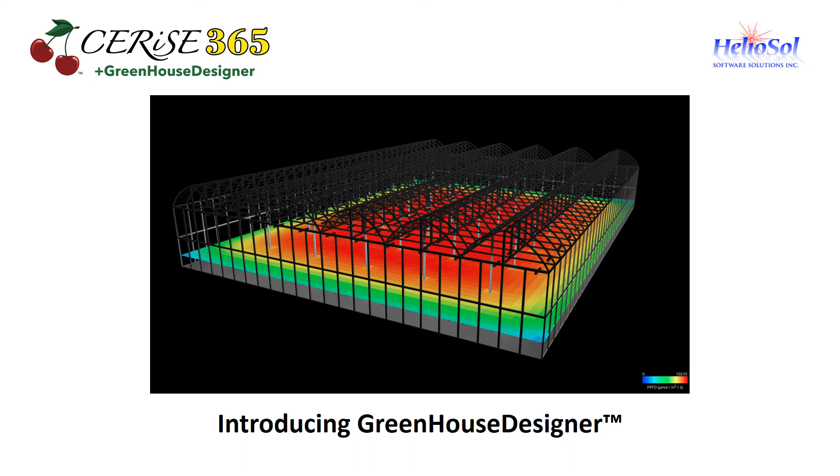Greenhouse Designer is a software as a service, or SaaS, application, where all the lighting calculations are performed in the cloud. All that the user needs is an everyday web browser running on a personal computer, tablet, or even a smartphone. Unlike architectural lighting design programs, no software installation is required.

The best way to introduce Greenhouse Designer and its features is to simply walk through the steps of designing lighting layouts for both a greenhouse and a vertical farm. So, having created an account, we can sign in with our username and password. Greenhouse Designer allows us to have multiple clients, and so we begin by selecting the New Client button.

Each client can be assigned a name and address, and optionally their geographic location. So we create a client called Aardvark Farms and select the Save Client button to add the client to our account. Now, each client can have multiple projects, so we select the New Project button to create one.

While there are many different greenhouse designs, most of them can be categorized according to the roof design style. The most popular ones are Arch, Gothic, Sawtooth, and Venlo. For vertical farms, we have a choice between tables and stacked trays in an enclosed room.

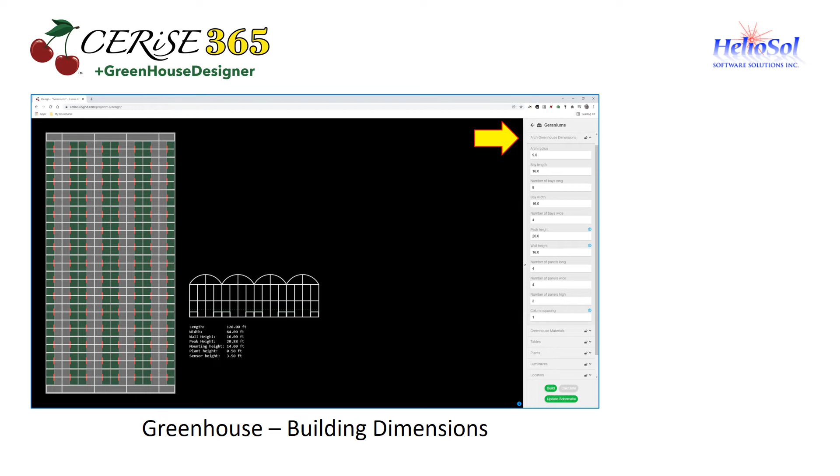We now open the Greenhouse Dimensions tab, which presents us with a variety of dimension parameters. The explanation of these parameters is provided in the Cerise 365 plus Greenhouse Designer User Manual, but the design process for each of them is straightforward. We can, for example, change the number of bays wide from 4 to 6, and select the Update Schematic button to redraw the layout. The Build button will change the color from green to red when the schematic needs to be updated.

Behind the scenes, Greenhouse Designer redesigns the building geometry without communicating with the cloud server. If we enter an invalid parameter, such as a wall height that is greater than the roof peak height, Greenhouse Designer will explain the error when we attempt to redraw the schematic layout.

Once we are satisfied with the building geometry, we can select the Greenhouse Materials menu tab to specify the greenhouse glazing properties. Greenhouse Designer models the optical properties of greenhouse glazing, including transmittance, reflectance, and light distribution. These properties can be independently specified for each wall and the roof. In addition, the floor reflectance can be specified.

Glazing can be specified as clear, diffuse, or opaque. An advantage of this is that the reflectance of energy curtains and light pollution abatement screens can be modeled. Highly reflective curtains and screens can recycle the light in a greenhouse, significantly increasing the photosynthetic photon flux density, or PPFD, incident on the plant canopy, and in doing so save energy.

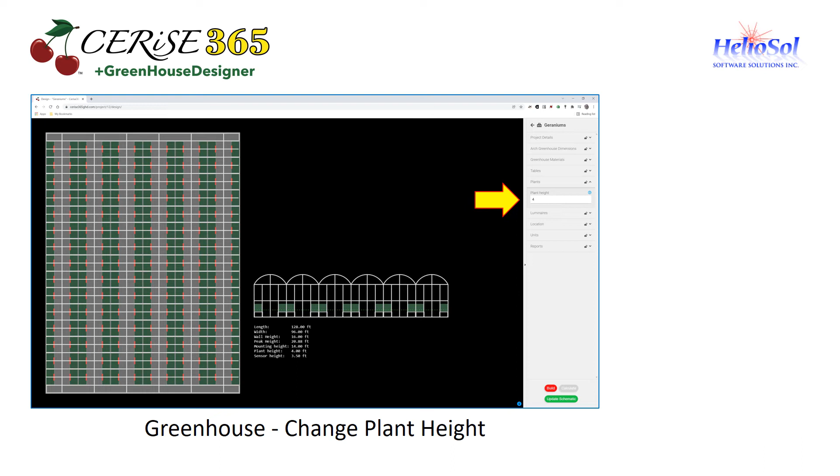Choosing the appropriate plant height is important, as the canopy of tall plants, for example trellis tomatoes, will be closer to the luminaires. This will affect both the PPFD values and their spatial uniformity within the greenhouse.

Luminaires are, of course, at the heart of horticultural lighting design for both greenhouses and vertical farms. Greenhouse Designer includes a database of horticultural luminaires from many different manufacturers, each with its own photosynthetic photon intensity and spectral quantum distributions. Greenhouse Designer relies on the ANSI/IES TM-33-18 standard for electronic transfer of luminaire optical data to represent the optical properties of these products. In fact, TM-33 was originally developed by SunTracker Technologies specifically for Greenhouse Designer before becoming an international standard.

To choose a specific luminaire or browse for an appropriate product, we select the Choose button, which opens the luminaire database page. We can select the manufacturer's product by its catalog number, and we can open SunTracker Technologies CeriseDocs to view its luminaire optical properties. CeriseDocs displays all of the luminaire optical data present in the TM-33 document in both tabular and graphical form. Here, the product spectral power distribution is displayed.

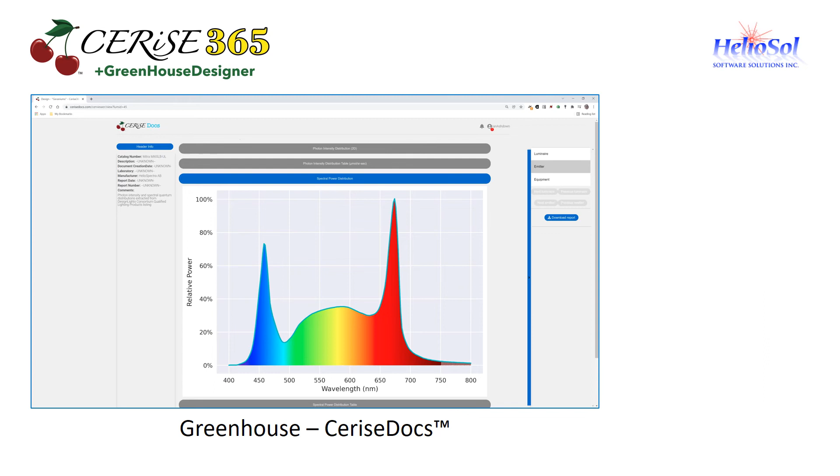Having chosen our luminaire, we can now specify the row and column spacing, the mounting height, and whether the luminaires are to be oriented parallel or perpendicular to the building length. Greenhouse Designer positions a rectangular array of PAR or quantum sensors with 2-foot spacing at a user-specified distance above the floor to measure the PPFD distribution. In general, we want to position the sensors to be at the height of the plant canopy.

We can further specify the greenhouse's geographic location. With this information, Greenhouse Designer can calculate the monthly daily light integral, or DLI, values for its project report.

Finally, we can specify whether the measurement units are to be imperial or metric. We would probably want to do this at the beginning of the project, though the default choice can be specified in the user account. Having specified the project parameters, we select the Build button.

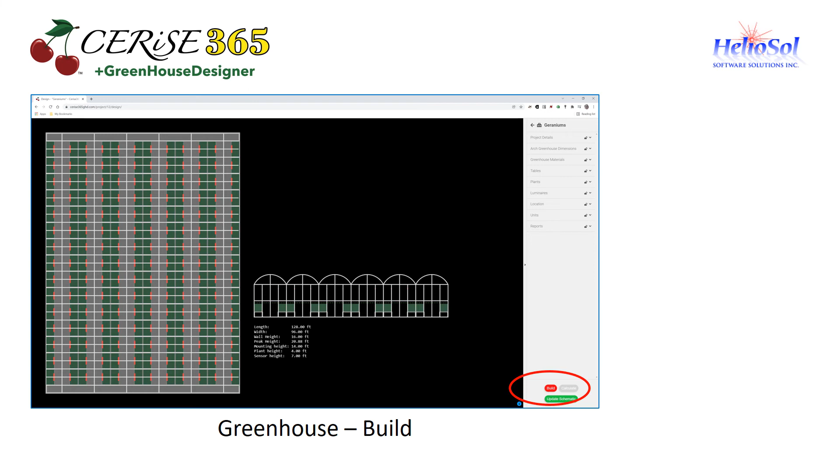The Greenhouse parameters are sent to the cloud server, which takes less than a minute to prepare a computer-aided drafting, or CAD, model for the lighting calculations. This is where Greenhouse Designer differs from architectural lighting design programs. Without the unlimited complexity of architectural designs, Greenhouse Designer can use a parametric model to represent the greenhouse or vertical farm geometry. The model is basically stretched and extended according to the user-specified dimensions.

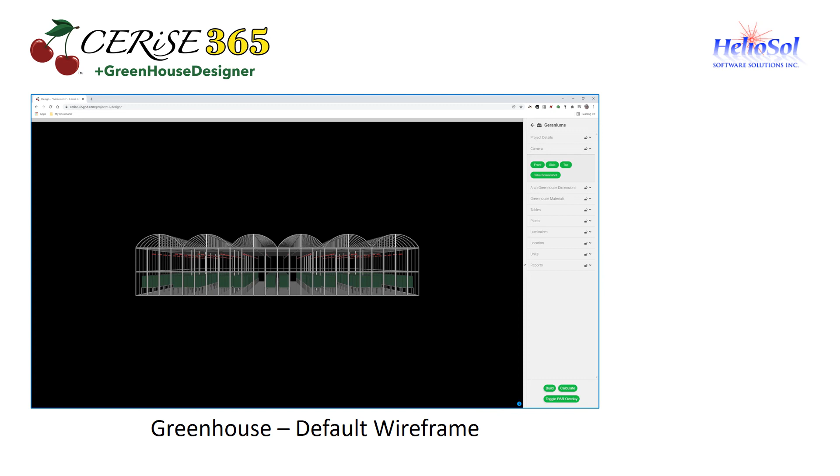The advantage, of course, is that the user does not need any CAD design experience or skills to generate horticultural lighting design plans. The resultant CAD design is presented as a so-called wireframe model that allows us to confirm that the design meets our requirements. It is a three-dimensional model, and so we can interactively view the design using the mouse controls.

We can also select the Toggle PAR Overlay button to view the PAR sensor grid overlay. In doing so, we can confirm that the PAR sensor height is where we expect it to be. If anything needs to be changed, we can do so and rebuild the greenhouse. Otherwise, we can select the Calculate button to perform the lighting calculations.

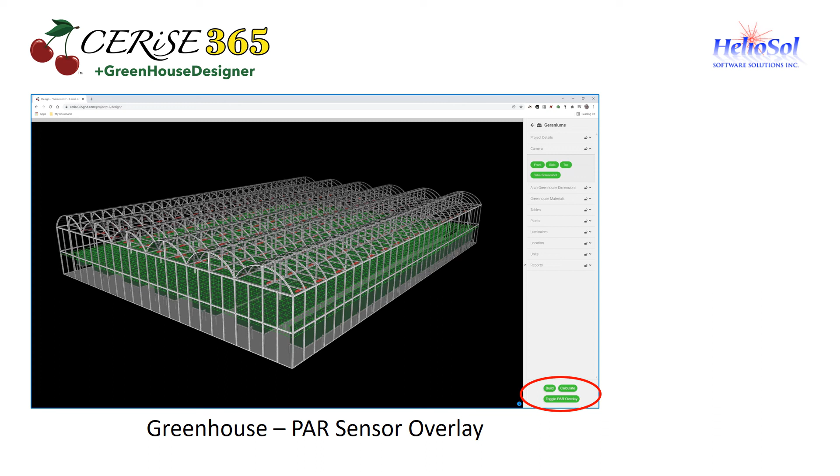Greenhouse Designer uses the same calculation engine that has powered architectural lighting design software for nearly a quarter century. It models both the light directly emitted by the luminaires and light reflected from illuminated surfaces. The calculation time depends on the number of luminaires and the size of the greenhouse, but in general, it will take only a few minutes to complete the calculations.

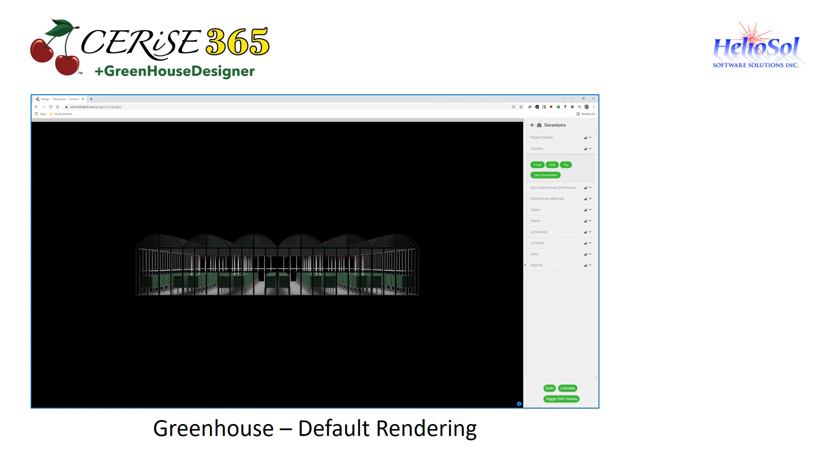The resultant photorealistic rendering shows the distribution of light in the greenhouse using white light. If the spectral quantum distribution of the luminaire is known, it would be possible to render the greenhouse using the light source colors, such as yellow for high pressure sodium or blurple, or blue and red LEDs. However, it is more informative to use white light. The rendering is also a three-dimensional model, and so we can interactively view the design using the mouse controls.

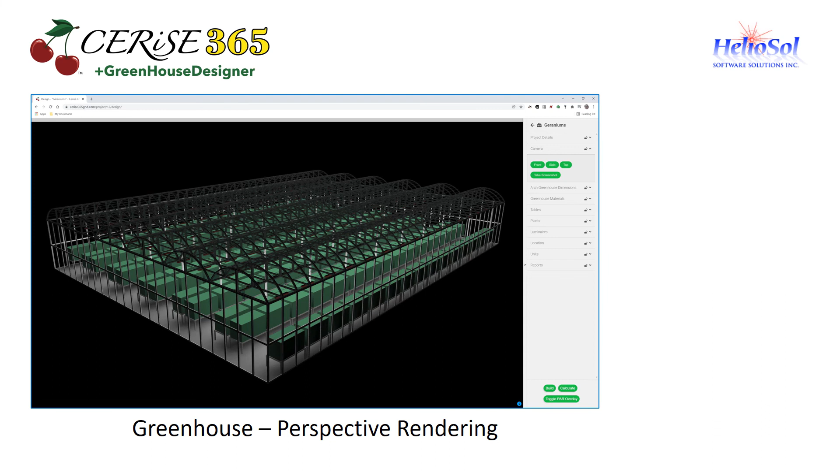We can also use the camera controls to select predefined camera positions, such as this top view. By selecting the Toggle PAR Overlay button, we can display the spatial distribution of the PPFD at the height of the plant canopy. We can also choose an arbitrary camera position and orientation, and again view the PPFD distribution. We can further select the Take Screenshot button to capture an image of the rendering for inclusion in the custom report for a client.

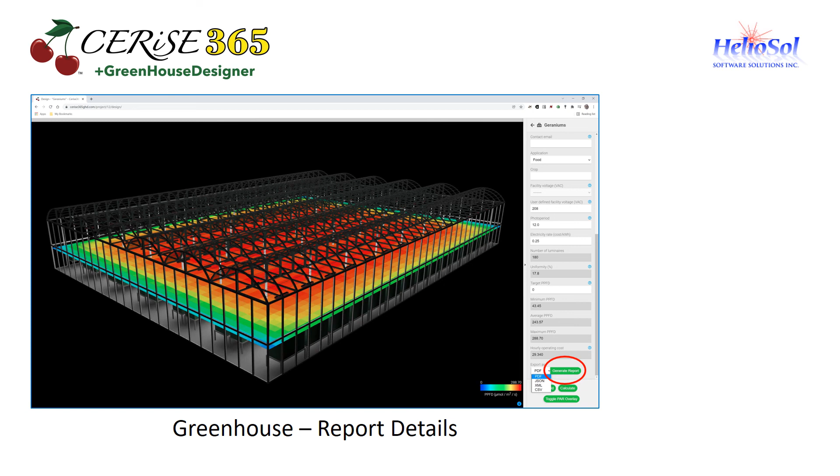Greenhouse Designer can generate a comprehensive project report for the client with user-specified parameters such as target PPFD, photo period, facility voltage, electricity rate, and more. The report can be generated in various formats such as PDF, JSON, XML, and comma-separated value spreadsheets by selecting the Generate Report button. It will take a minute or so to generate the report, after which the file will be automatically downloaded to the user's web browser.

The default PDF report includes textual information regarding the client, project, building and table dimensions, luminaire, and report summary, as well as graphical displays of the PPFD distribution, the luminaire photon intensity distribution, and the monthly daily light integral report for the building's geographic location.

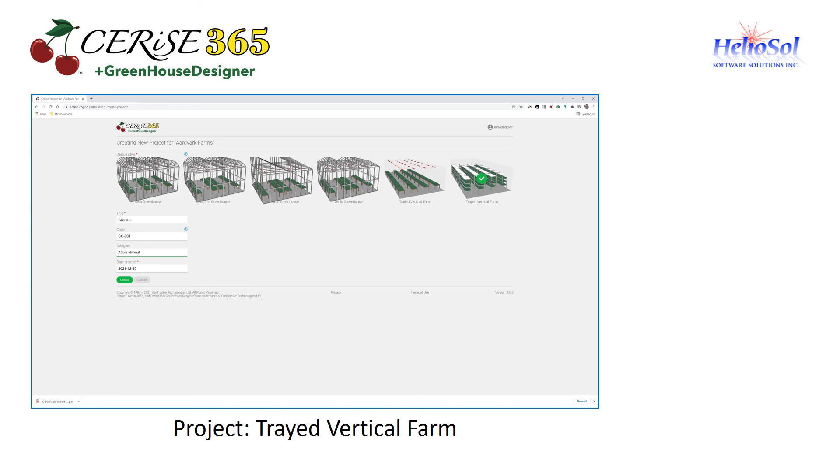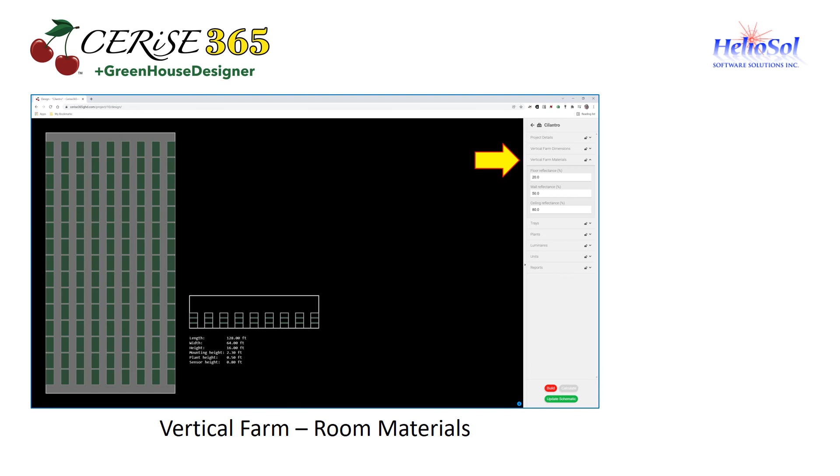Our next project is a trayed vertical farm. The alternative is an enclosed room with plants such as cannabis placed on tables or on the floor. Greenhouse Designer again creates a default vertical farm for us with the design shown in the plan and elevation views. We can modify the room dimensions as needed, and also the room surface reflectances. The default model assumes 3 stacked trays, 2 of which are equipped with luminaires, but we can change this according to our needs.

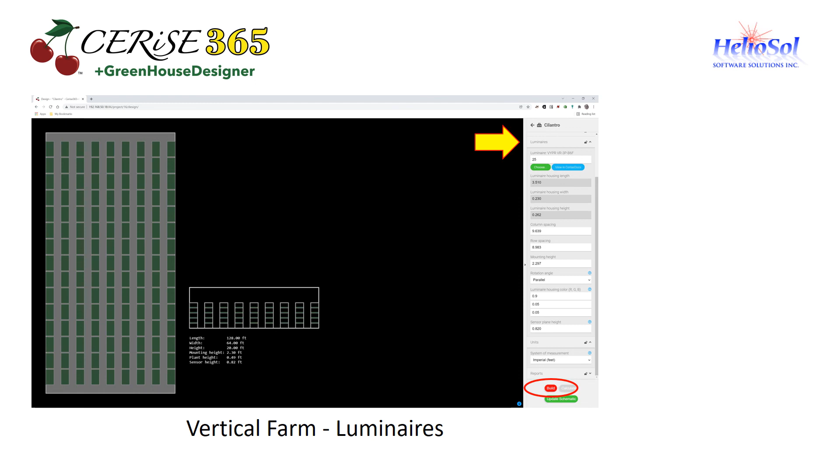As with greenhouses, we can choose luminaires from the luminaire database and specify the row and column spacing on a per tray basis. We can then select the Build button to view a wireframe model of the stacked trays. Each tray, however, is individually illuminated, and so it does not make sense to render the entire room. However, we can select the Only Build Tray Model checkbox before selecting the Update Schematic button. This gives us the tray schematic layout showing the luminaire spacing, plant height, and PAR sensor height.

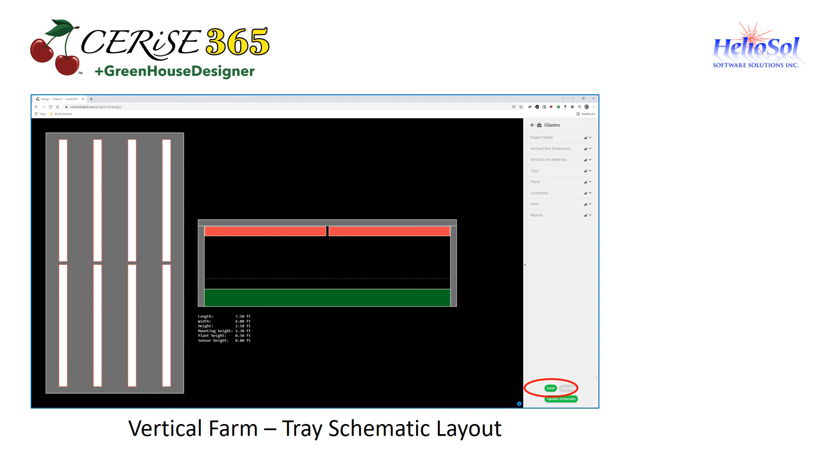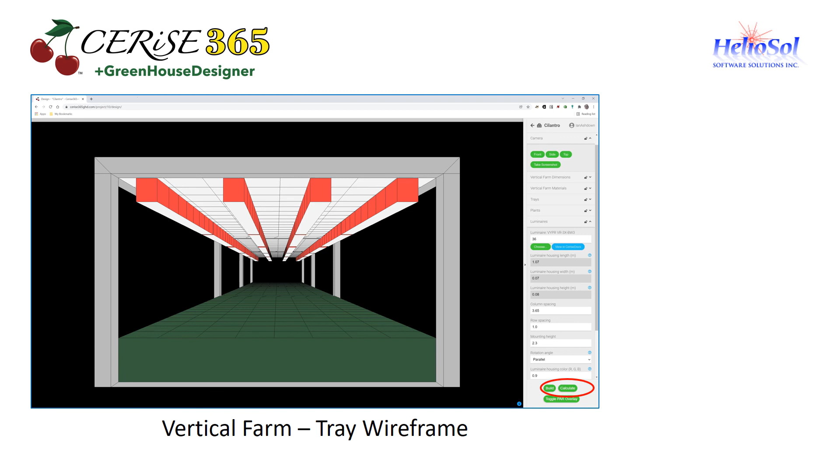Selecting the Build button gives us a wireframe of 3 trays in a row. The reason for 3 trays is that light from the luminaires of one tray will likely illuminate adjacent trays as well. Calculating the lighting for 3 trays in a row allows us to see the PPFD distribution on both the middle and end trays. Selecting the Calculate button gives us the PPFD distribution, where the differences between the middle and end trays become clear.

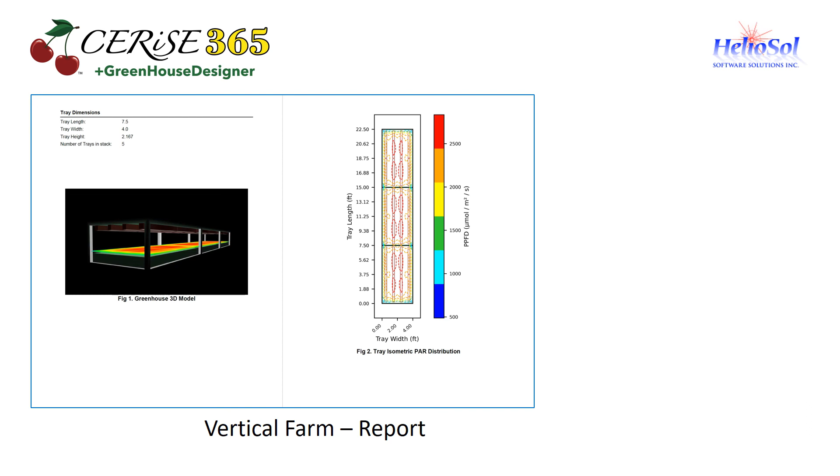Finally, we can generate a report that includes textual information regarding the client, project, building and tray dimensions, luminaire, and report summary, as well as graphical displays of the PPFD distribution. 3 trays are shown so that the PPFD distribution of both middle and end trays can be seen. The report also shows the luminaire photon intensity distribution, which can have a marked influence on the PPFD distribution with different plant canopy heights. This may prompt the user to specify a different luminaire or vary the luminaire spacing.

This concludes the introduction to Greenhouse Designer.